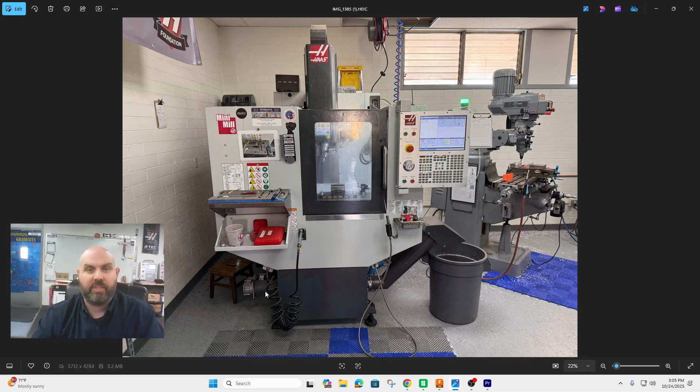Today we're talking about machine libraries. Specifically, how do we import our machine, which is a Haas mini mill, into Fusion? And then how do we add work holding, which happens to be our Fifth Axis, which allows you to switch work holding very quickly. So how do we also switch it within Fusion and have it all simulate accurately? Stick around. I'm going to show you how.

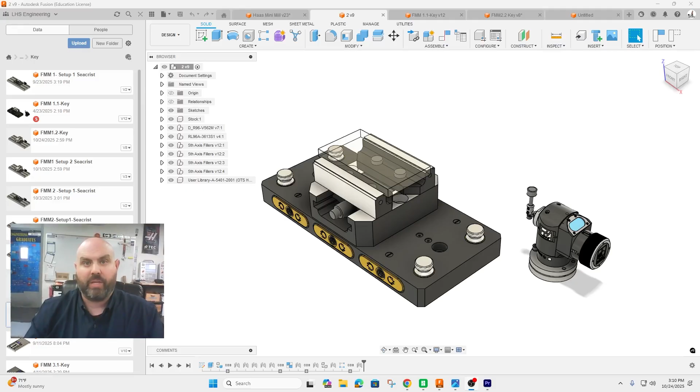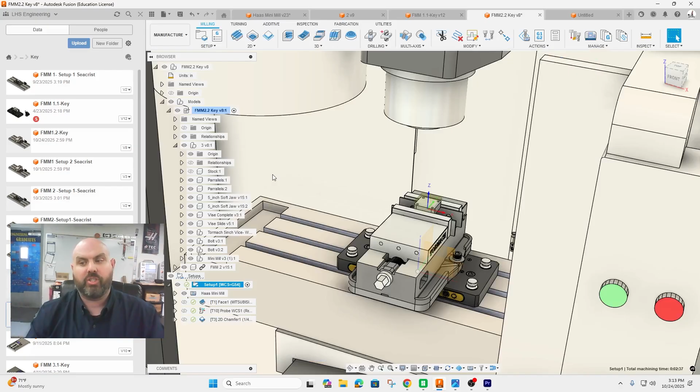Okay, to get to the simulation step, there's 5 steps we have to do beforehand. First, we have to design our work holding in the CAD file. We need to modify the CAD file of the machine. We're going to have to add the machine into the machine library. We are then going to have to build a CAD file with the work holding and the part to be machined. Then move to the manufacturing workspace, do a setup, create the operations, and then finally be able to simulate it within Fusion.

First off, I create all the CAD work holding for the students, and it's in a shared project. But for those of you who need to know how to do it, I'm going to go ahead and demo it now. So first off, I save them. There is an order to the numbering system, but we're going to go ahead and make a number 7. So I'm going to save the file as just number 7 within my work holding for milling machines. I also do this for lathes.

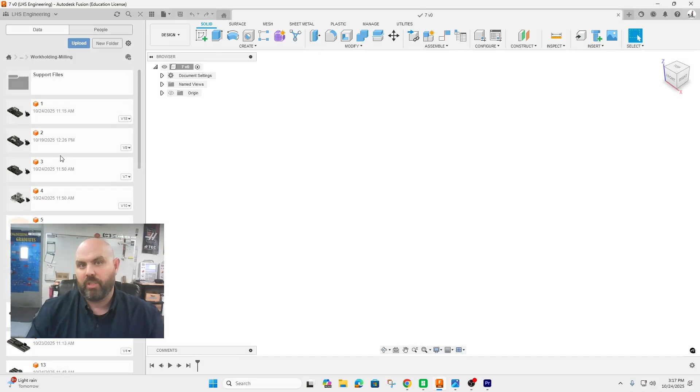And then I'm going to start adding components to the workspace. So my work holding supporting files is where I store all my vices, plates, and all the things that go on our machine. So we're going to start with a base plate. The most common base plate I buy is this double base plate from Fifth Axis. You can download it from their website. It comes in as a number, but I just change its name to double base plate. And then I insert it into the current design.

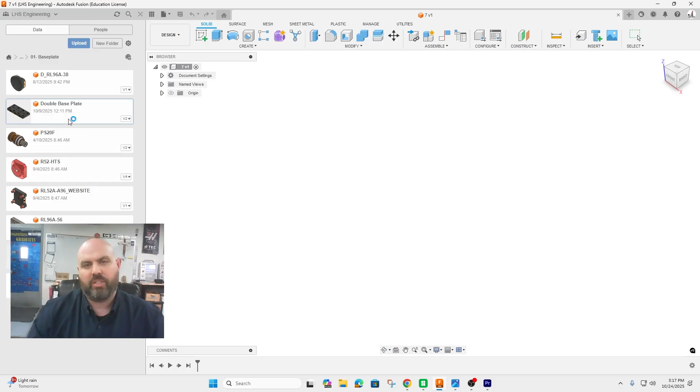Now, I don't really care where it goes in right now. I'm going to have to move it in a second. But the big thing I don't want is I don't want it linked to the original base plate. Breaking the link is going to be very important in this whole process. So I'm going to right click and say break link. And it moved in a way I don't want, but that's okay. The second thing is I want this just to move around as a unit. I don't actually care that all these components are movable.

Also, I'm not anywhere near the max mass of my machine. And if you were, you could actually put every bolt, nut, washer into this, and it will give you a mass of how much your whole project weighs if you are pushing the limits of, say, the mass your mini mill can hold. That's just a side note.

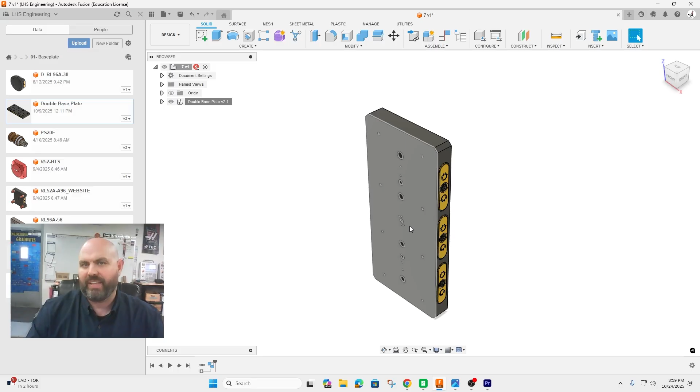So the first thing we're going to do now is unground from parent, and now it's free to move. It's also not a rigid group. So the second thing we're going to do is right click, rigid group, so all the subcomponents move as one. Now, the most important step is I need the bottom of this plate to be at the origin, because that's going to be very important when we set the origin on the CAD file for the machine. So when they come together, they line up.

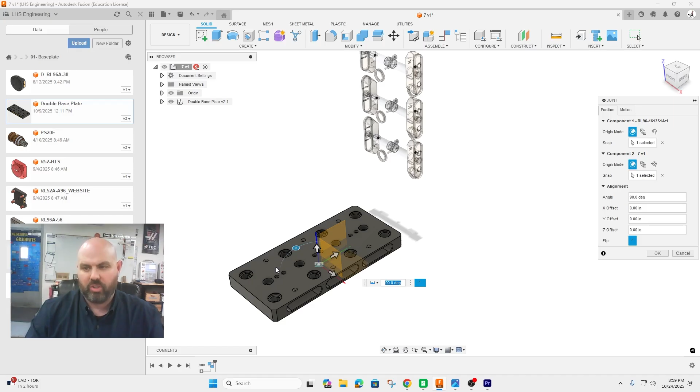So to do that, we're going to just use J on the keyboard for joint. I'm going to find the center of it, which is this point here. And then I'm going to turn on the origin, and I'm going to put it here. And I have to orient it in the proper orientation. So X, Y, Z matters. These go in my machine with the long axis along the X. So I'm going to rotate this 90.

When I click OK, those parts will move. And now we have it. If I really wanted to get critical, I should go in and rotate the other way, because this is actually the back side, because the open side is on the back and the torque specs are on the front side.

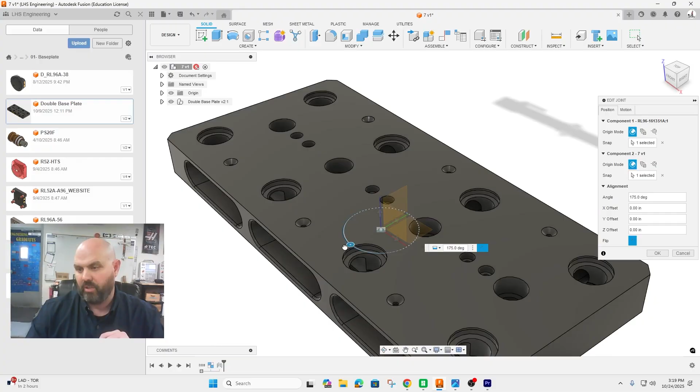So I'm going to edit the joint, and I'm just going to move it 180 degrees and get it going the right way. And you can see the torque specs are on the front, which is how my machine is. We're going to need to ground this or pin it in location so it won't move, so that when we do other things, we don't have problems. It's a very important step.

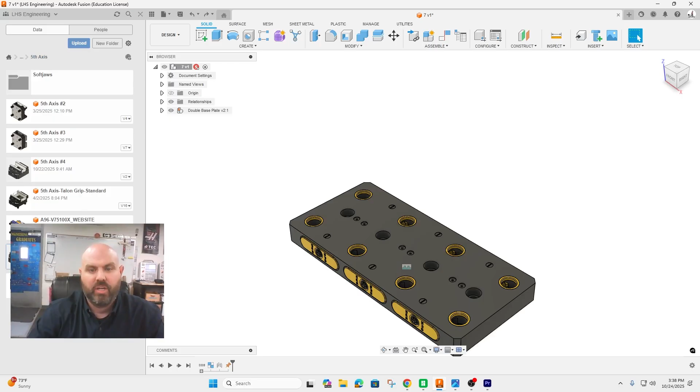So the next thing is I can turn off the origin. I don't need to see it anymore. Okay, our next step is we need to insert our vise. I've moved over to my fifth axis vises, and I'm going to right click. I know it's behind me, but I'm going to right click and say insert into current design. And our vise comes in. We're going to go ahead and click OK. And the very first thing we're going to do is break the link.

One thing this vise is going to have is we're going to actually model the stock that we would use with parameters so we could change the size into this work holding. So when we actually go to set this up and do the CAD files later, we'd actually take the part we want to machine, assemble it inside the stock as we hope to actually machine it, change the parameters so that the stock is the correct size, and then we'll move through the process. So to do that, we need the vise jaws to be dynamic within parameters. So the vise is not fully assembled right now. We're going to have to assemble it in this file.

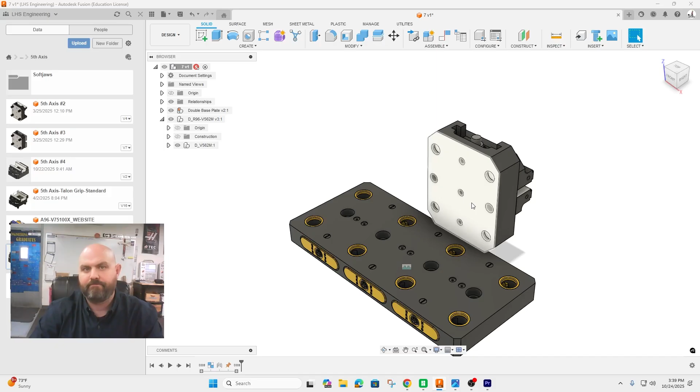So first, I want to get rid of the origin. I don't need to see it. Second, I'm going to take the base and attach it to the base plate. I don't have the pins. I could go to all that effort, but it just makes the file bigger, and they're not functional for the CAD, so we're just going to skip it. So on the keyboard, I'm hitting J for joint. We're going to assemble the bottom of the vise with the center of the plate right there. And we're going to go ahead and click OK.

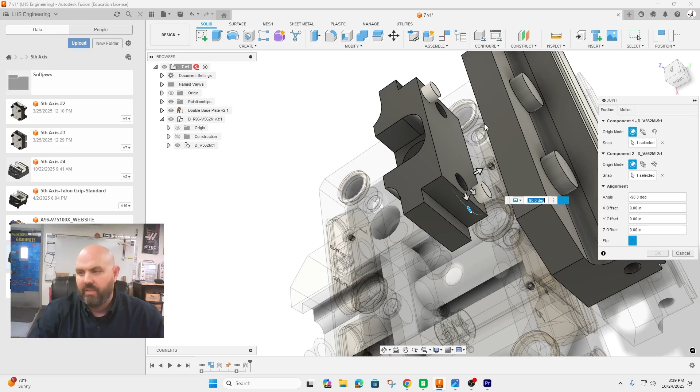Now, the jaws need to be linked together with the carriers. So I'm going to hit J. I'm going to grab any point on the jaw and any point on the carrier that matches and click OK. And then I'm going to hit J on the keyboard. Oops, before I do that, I'm going to move them out of the way, hit J, and I'm going to pick the carriers and the bottom of the jaw.

Now our next step, we need the dynamic parameters put in, because that's going to be needed to do the next set of assemblies. So we're going to go to modify, change parameters, and we are going to add 3 parameters. And I'm going to click OK here. The first one, I'm going to call stock_depth, which would be our y-axis. I'm going to set that to 3, and I could put down here y-axis. And then we're going to hit stock_width, and this would be also 3, and we're going to set this as our x-axis in the comments.

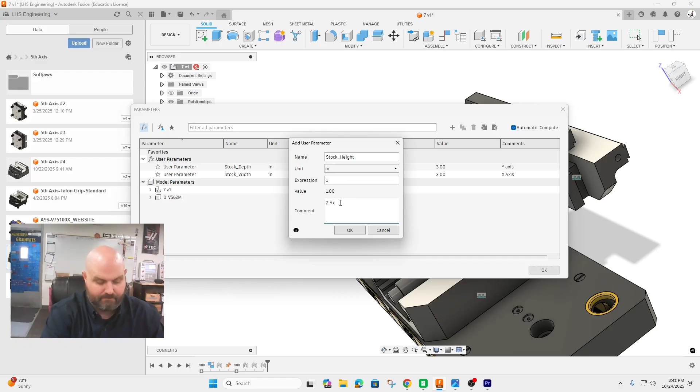Oops, I got those capitalized. I don't know if I did the other one capitalized. And then we're going to do stock_height. And we're going to set that to 1, and we would say z-axis, which will appear in the comments. And these all can be edited in the future to give us the proper stock height. And then I like to check these because depending on other factors, sometimes they get buried into things. This will always put them in the favorites. And go ahead and click OK.

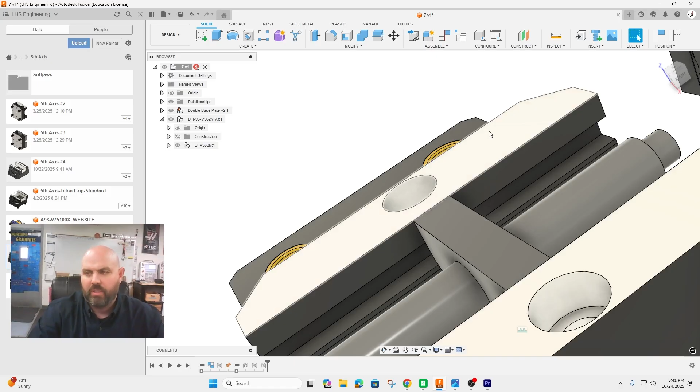Now, one piece of information we need, which we'll jot down on a piece of paper, is we are going to use the center of this bar here as our driving point, but it is not level with the ways of the vise. So I need to inspect that difference, and it comes out to 0.011. So we're going to need that number for later.

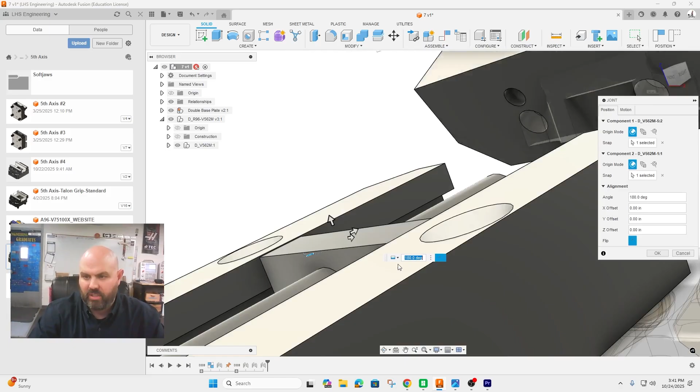So I'm going to go ahead and hit close, and I'm going to go J for joint. It doesn't really matter which jaw you start with, front or back, but I'm going to pick the bottom front edge of this jaw. And I am going to click here, which actually puts it wrong, as you can see right there. But if I move it up, I can move it up 0.011, and now it's on there.

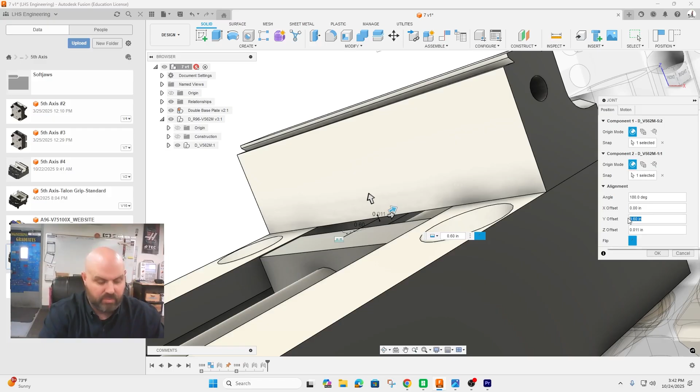Now I'm also going to slide it in this direction, and we're going to have to make a modification in a few minutes, but we're going to put this parameter as stock depth divided by 2, because remember these are self-centering jaws, so we only want 1/2, and we're going to go ahead and click OK.

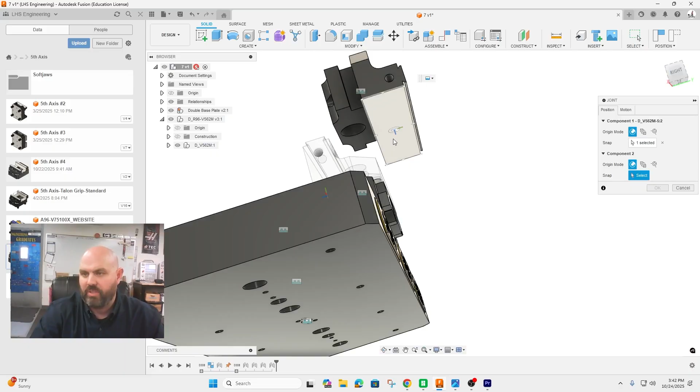And now, instead of doing that same procedure, which would be fine, the easier way to do it is just to go J, take the center of this vise and the center of this vise, and then set the distance apart to be stock depth. If I can spell it, there we go, and click OK. And now you can see that it is working. And if we go into parameters, we can do change, and we're going to change that stock depth to 2, and now the jaws change together with the vise.

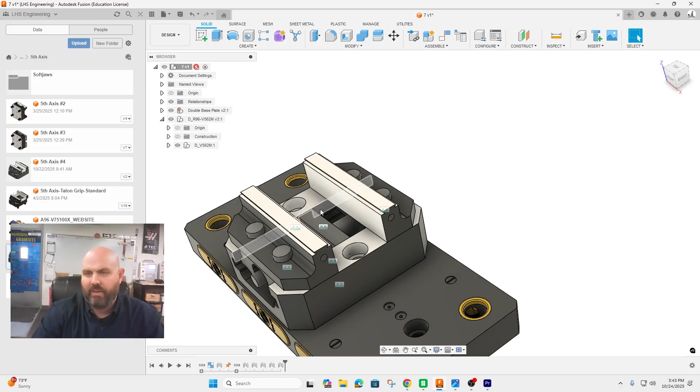Now, one problem we have is we are actually going to use these Talon grips on the top to attach our part for this example. So we need to now know what the change is so it actually grabs on this edge versus this edge. So I'm going to use inspect, and I'm going to inspect between these 2 surfaces, and the delta is 0.1. So the delta in total is 0.2 if we're going to do the same thing here.

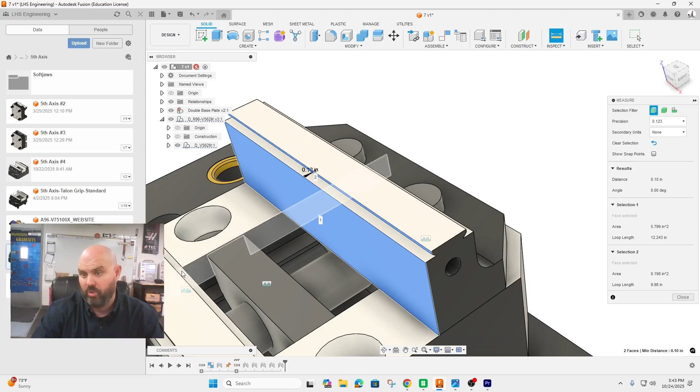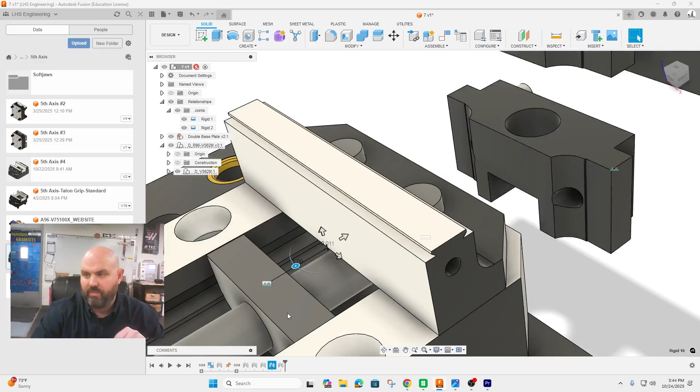So I'm going to open up these relationships, well, I can come down here to these relationships and go to the last two. So I'm going to edit the joint, and I'm just going to say, take the stock depth and subtract 0.2 from it, and that will close the distance. And if I go back to this joint, I'm also going to take this one. I'm going to have to put parentheses because I need to take the answer and then subtract it by 0.1. And now, oops, I did something wrong. Edit joint. Oh, it needs to be 0.1, not 1.

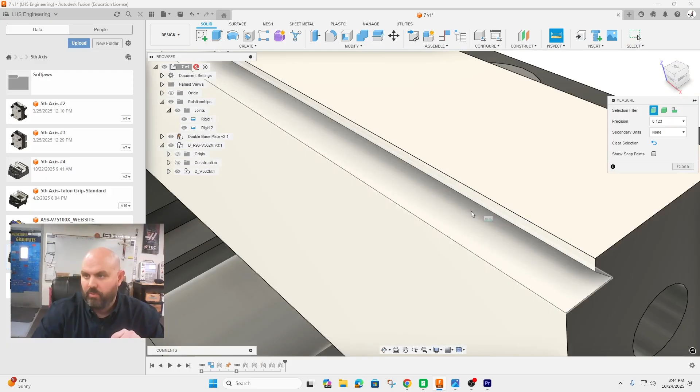And now, if we inspect between these jaws from here to here, it should be exactly the number we were looking for at 0.2. So we are most of the way there. We're going to do a few more things.

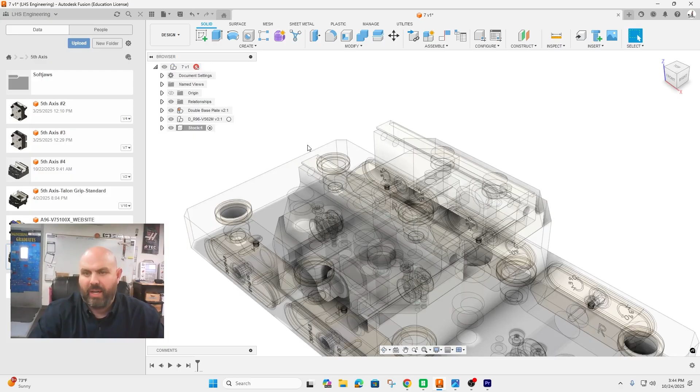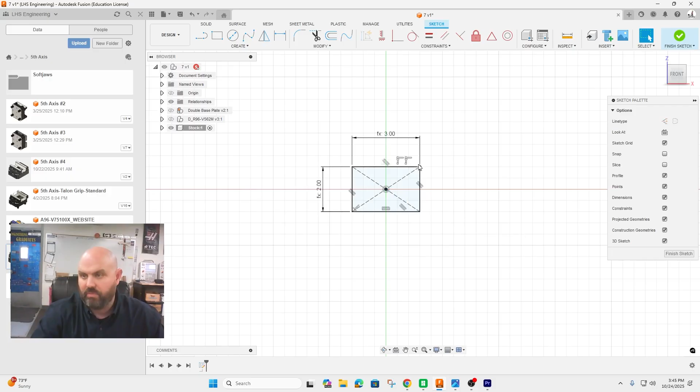One is we're going to draw the stock. So I'm going to go ahead and create a new component, and I'm going to call it stock. And I'm going to draw it. It doesn't really matter where because we are ultimately going to assemble it. So I'm actually going to turn these things off so I can start a sketch down here at the origin. I am going to use a center justified rectangle, and this would be stock depth, tab, stock width, enter, and we're going to go ahead and extrude that to stock height.

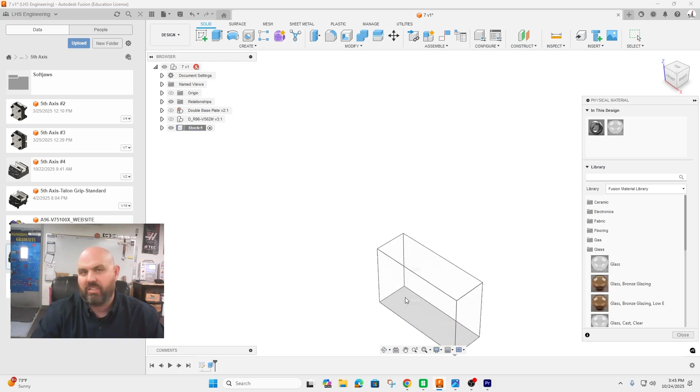And then to make our life easier, I'm actually going to make the stock out of glass. So I'm going to right click on stock, go to physical materials, and set it to glass. That way when we do the assembly later, it's clear and you can see your part on the inside with ease. This would be also a factor if you had a mass issue with your machine, so be aware of that.

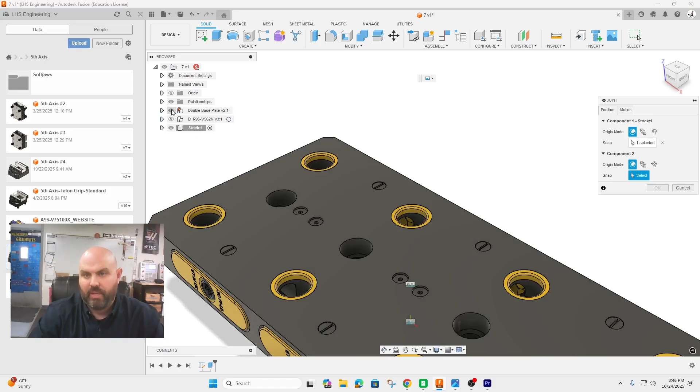So now we're going to actually join this onto the part. So I'm going to go ahead and hit J. And because this is a rectangle, it doesn't really matter. I'm going to click the center bottom, and then I'm going to turn on these other features. Oops, my mistake. I'm going to turn them off. I do not want the center bottom. I want the edge here, and then turn on the center features. And I am going to select the edge, not that edge, this front edge.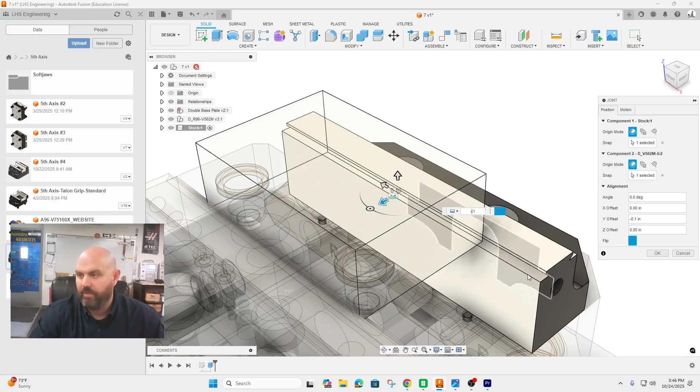And I can revolve it around 180 degrees. And then I need to offset it back to 0.1. I guess it's negative 0.1. There you go. And we click OK. And now if I go back to the main page, here is our assembly.

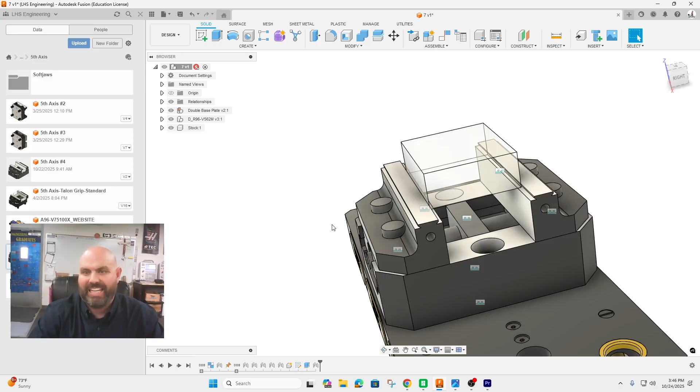And we are going to go ahead and check that it works by going to change parameters. We're going to change the stock depth, which is the only one that matters, to 2.5. Press enter. I can see it move in the background, and you'll notice that it all sticks together as normal. So now we have the real important part of the work holding together, but if we want to simulate accurately and show us any collisions, we need to add all the other features.

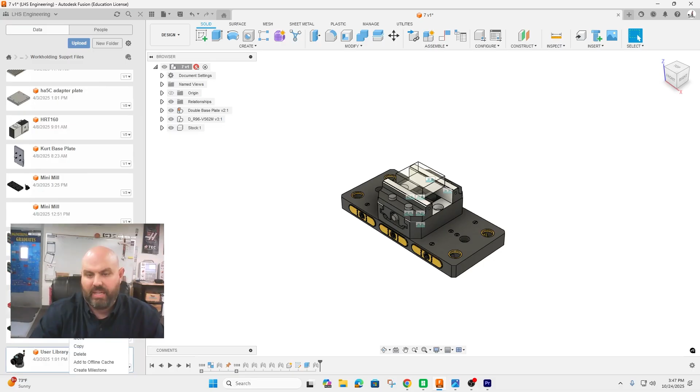The big feature on our machine is we have an OTS probe over here on the back right-hand corner. So I'm going to go into my files, work hold supporting files, and I believe at the bottom of this list, I have that probe. I'm going to go ahead and right-click and say insert into current design. And it kind of comes in the middle because it comes at the origin. I'm just going to slide it out of the way and click OK.

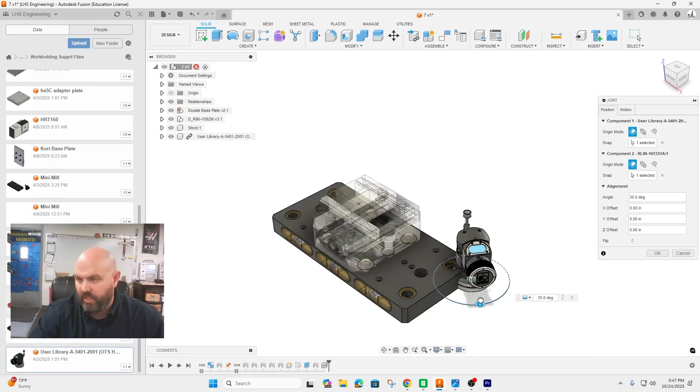And then I'm going to go J to join, and I am going to grab the bottom of the probe. And I am going to grab this corner right here, and I'm going to invert it, and I'm going to rotate it into the degree it goes. And then I know that mine happens to be 2 5/8 in this direction, which is actually X, but it's labeled Y. So 2.625, and it is offset in X 1.6 is where ours ends up.

Note, when we do this with the machine, it actually doesn't line up on the same T-slots, but my machine is different than the machine in Fusion, slightly with the T-slots, and I care more that this is accurate to my machine than to the T-slots. So if we had any other features to add, a rotary, any other work fixtures that may be in the machine, we could go ahead and continue to add them.

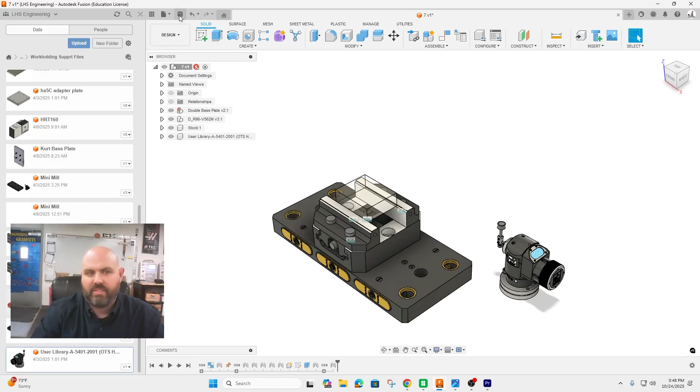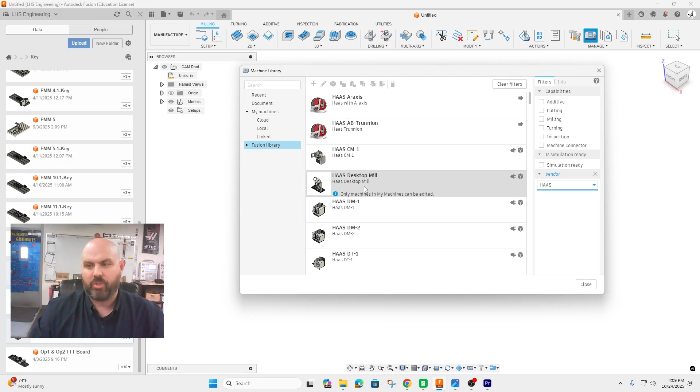The next step is we need to get a copy of the machine model into Fusion, and we're going to get that from Autodesk. We do have to download to then upload. Not the best method, but it's a method that works. So we're going to switch to the manufacturing workspace. We're going to go to the machine library, and we are going to click on Fusion libraries. I'm going to switch over here to Haas, and then I'm going to scroll down and find the mini mill. And there it is.

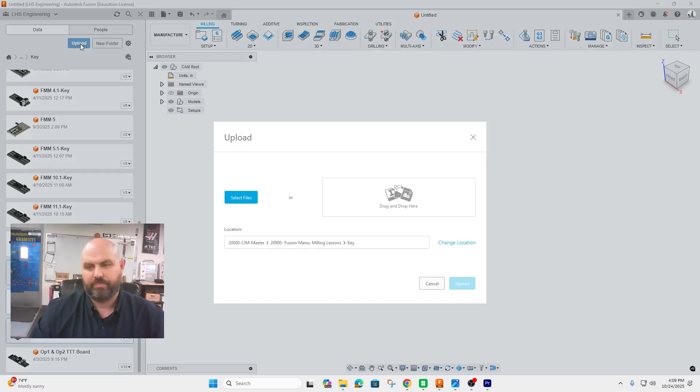And then I am going to actually export it. And it's going to download it, and I want to make sure it is downloaded as an F3D. And we're going to go ahead and hit export, and it's going to download. In the meantime, while it's downloading, I'm going to hit close, and then I'm going to go over here to upload. And I'm going to upload it into this folder where I store stuff. Here is the Haas mini mill. I'm going to click OK and upload, and it's going to take a moment for it to go through the uploading process.

Now, unfortunately, it appeared behind me on the screen, so I'm going to double click on it to open it. So it's going to open over here, and we're in the design phase. Now, the real critical component here is we need the origin of the machine to match the origin of the work holding, because when we bring them together, they're going to line up origin to origin. So we want to essentially match where the origin is in this model here with the origin of the work holding. The work holding origin was at the bottom of the base plate, so we want to basically put the origin of the machine at the center of the table.

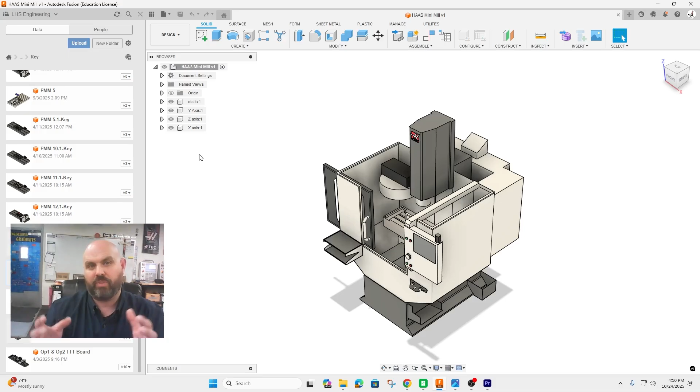Some machines it's not the center, and you can shift it left or right as needed. So what we're going to do here is we're going to go ahead and turn on origin. And this one came in, and it looks like it's come in exactly where we need it to be. Not all machines do. If it did not, I would use an as-built joint to move these to that location.

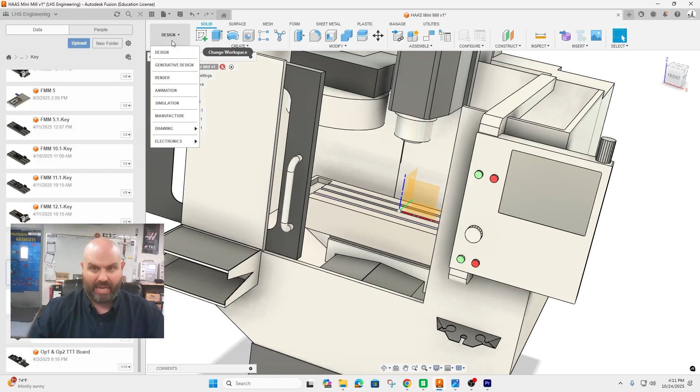So now that we have both the work holding done and the machine, our next step is we have to create a machine library machine. So we're going to switch back to manufacturing, and we're going to go ahead and click on machine library. Now, I'm going to do mine in my local. Normally, I would recommend doing it in the cloud. I already have a bunch of machines, so we're going to use local just to keep them separated.

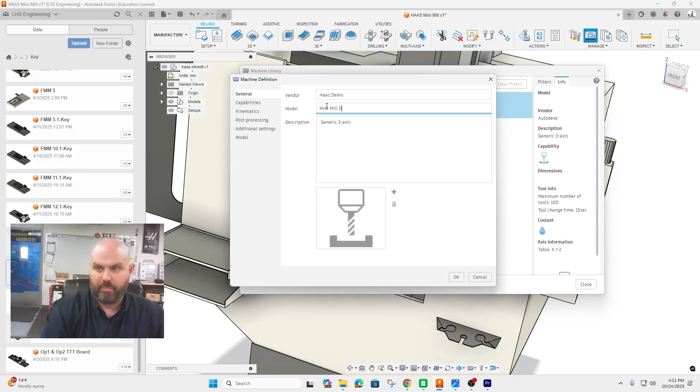We're going to hit plus and milling machine. And then we're going to go ahead and label it. I'm going to call this Haas and then demo, because this is an example, and the mini mill. So mini mill demo. That way I don't use it in the future because I already have the one that works. And I can write in a description here if I want.

Okay, for capabilities, we have 10 tools, and our maximum feed rate is 650 inches a minute. So we're going to go ahead and hit 650 and enter. Oops, we'll go to edit again. It'll bring us back up. We're going to go back to capabilities, 10, and make sure this has 650 inches a minute. Sometimes it converts it to millimeters, and that's like 25, and we'll have all sorts of problems.

The real one is kinematics, I think is how it's pronounced. We need to get this in the proper orientations. Now, the real way to think about this is think from the ground up. So as we get to each area, starting at the bottom, so we have the base, doesn't move. The saddle that controls the y-axis in a mini mill moves on top of the base. So the very top level needs to be the y-axis.

So it's hard to pull y up, it's easier to pull x down. So I'm going to move x below y. So the y slides front to back, and then the x slides on top of the y. So we have x, y, and then on top of that is the table. Now the z is on the head, so we're going to pull the z down under the table so it's on the head. And now we have the machine's kinematics, how it moves, oriented properly.

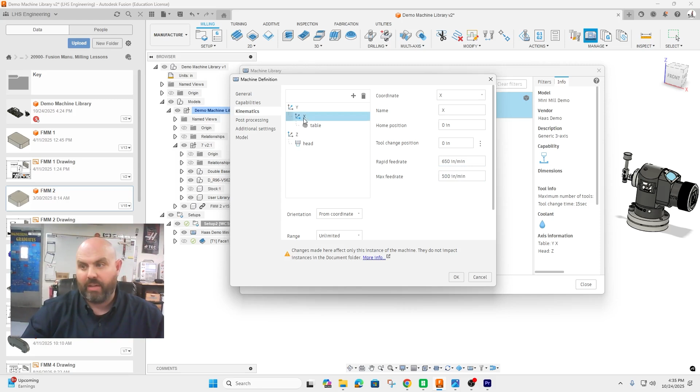Okay, for the rapids, we need to put in the rapid. For the mini mill, the rapid is 650 inches per minute, and the max feed rate is 500. Now, we would also do that for the X, which I've already done, and for the Z, which I've already done. It needs that in order to read the tools properly.

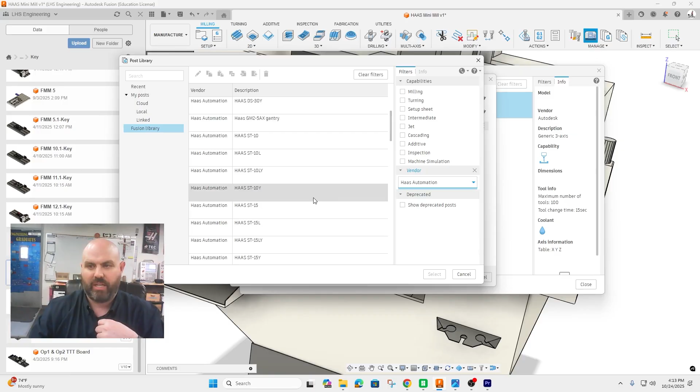So next step is post-processor. We're going to click on this, and the post-processor we're going to use from the Fusion library, once again, use Haas automation, is the next gen controller post processor. So I'm going to go ahead and click on this and then hit select, and it's going to ask us where we want to save it.

I am going to save it locally, not in the cloud. Cloud is recommended, that way you can use multiple computers. If you save this on only the machine you're on now, that's the only machine you'll ever be able to use it on. So go ahead and copy my post.

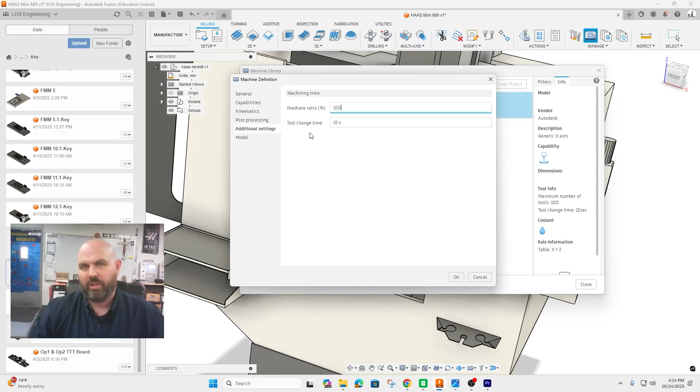Additional settings we're not going to play with. You can modify how fast the tool changer is. This will give you better numbers on machining time if you're looking at that.

Now for the model, we downloaded a model that we know has the proper origin, so we're going to use that one. So we're going to go ahead and hit select. Mine is in this folder, so I'm looking for Mini Mill. It's the one that I downloaded the latest, which is this one here. And I'm going to go ahead and hit select.

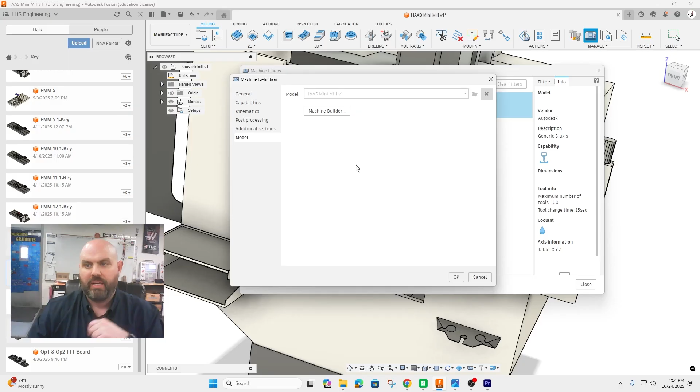Now I'm going to go into Machine Builder. Yes, I want to save it. And it's going to bring up the machine.

This is a model of the machine, but it's not editable in that way. We can see that our origins match, but more importantly, we need to verify a couple of steps: one, that all the axes move in the correct directions, and two, where our stock or file will load into and where the tool goes.

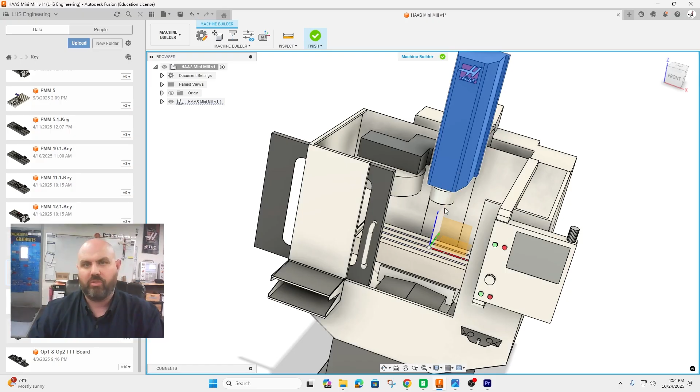First, let's check the axes. We're going to go here to Machine Preview, and there are these slides. It doesn't matter that it slides through the machine; what really matters is it moves the way the machine moves. X moves on top, yep, and Z should come up and down. So those all work. We can click on the home buttons, but you can also just hit OK.

Now the other thing we need to double check is we'll click on Machine Setup. These top two matter the most. Where is the part? Right now the part is right here at the center—that's what we want, so that's good. When we click on Tool, that's up at the top, also where we want. It does not always come in this way for your machine.

So in theory now, if all is programmed correctly, when we bring the work holding in, it will align point to point here, setting it up on the table like it's in our machine, and the machine kinematics will move in the motions that we plan.

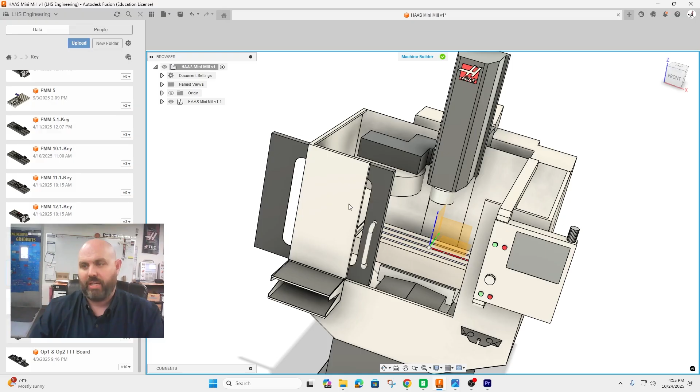We're going to go ahead and hit Finish, then go back over here. It's thinking through the machine library, and you notice we have this Haas demo, Mini Mill demo in our local library. We'll go ahead and hit Close. We are going to get out of this as well—we don't need this anymore.

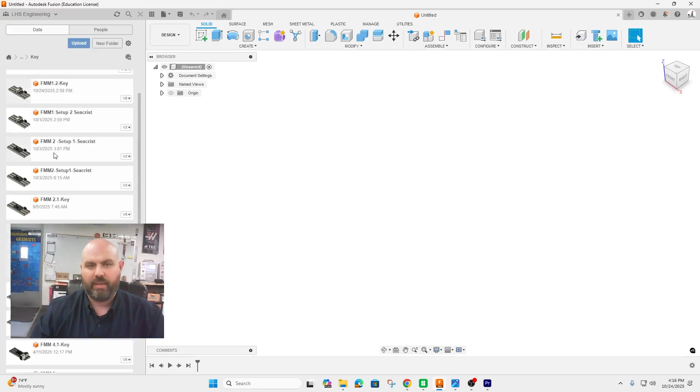We're going to do a quick demo of how all of this would come together. The very first thing is I am going to need to use a part. So we're just going to use this simple part right here, and we're going to put it together with our work holding and then the setup and do a simulation.

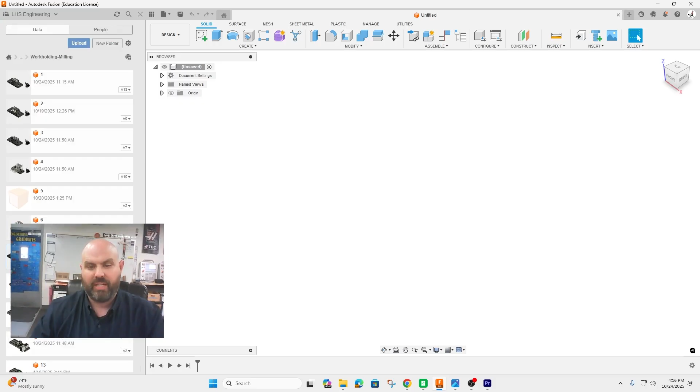We're going to go to Home. We're going to start with the work holding because we need it to be on the bottom. So I'm going to go ahead and open work holding, the milling, and then we are worked with tool number 7, and I'm going to insert that into the current design. Now I know because I designed all these parts, I'm going to go ahead and click OK.

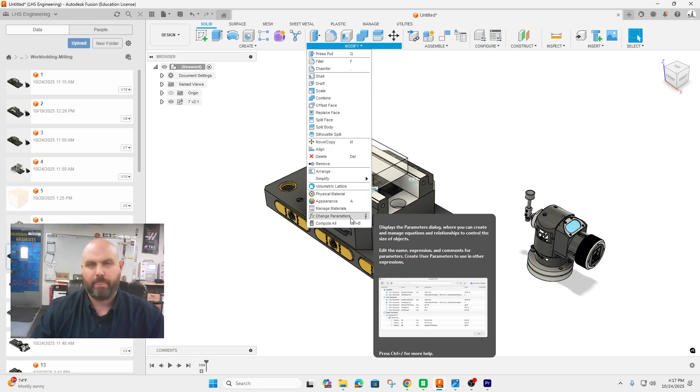First thing I'm going to do is break the link, because I don't want the changes to the stock here to affect my original. I'm going to change the stock size first. I know this material is aluminum and it's 2 inches by 2 inches by 1 inch thick stock that we're going to use to manufacture it. So we're going to go into the parameters and change it. We can close this: the depth is 2, the width is 2, and the height is 1. And there is our stock.

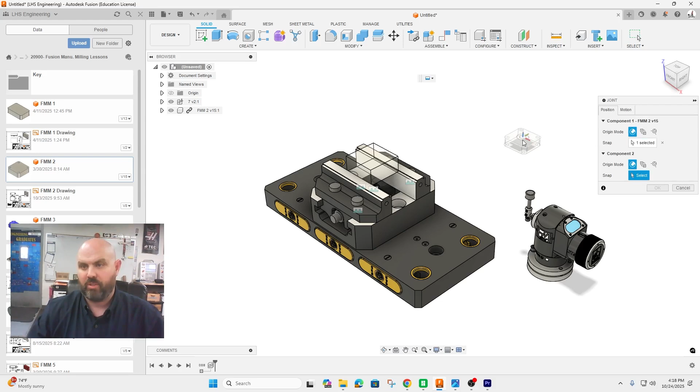The next thing we need to do is put the part we want to machine into the work holding. I've already navigated to that. I'm going to right click and say insert into current design. It's going to come in. We're going to once again slide it temporarily out of the way, and then just like a part, we're going to assemble it with a joint—J for joint, center of the part, center of the top. Obviously, that's not how it's going to get machined.

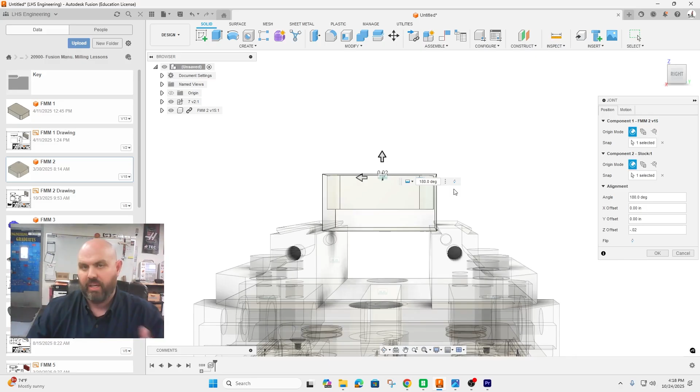We're going to flip it over. My standard policy is we're going to push it inside the stock by 20 thousandths. So I'm going to go to the Z and say negative 20 thousandths, which will allow us to have some material to do a face cut and remove. We can see that this is the raw stock and there is our part. We go ahead and click OK.

The next step is we need to save it. So I'm going to go ahead and save it, and I'm going to call this demo machine library.

Go ahead and hit save. It's important — you cannot work with the machine if you haven't saved it.

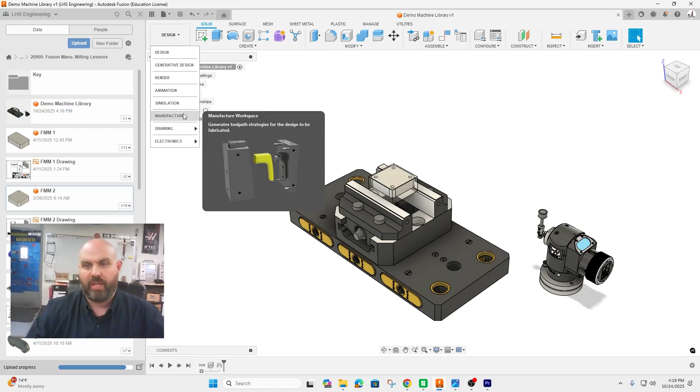Next step, over to manufacturing. We're going to go ahead and hit setup, and then we are going to select our machine. It'll automatically go into our machine library. I'm going to select this machine — you can see it has the name of the machine there. We are doing milling; we're going to change this here in a second.

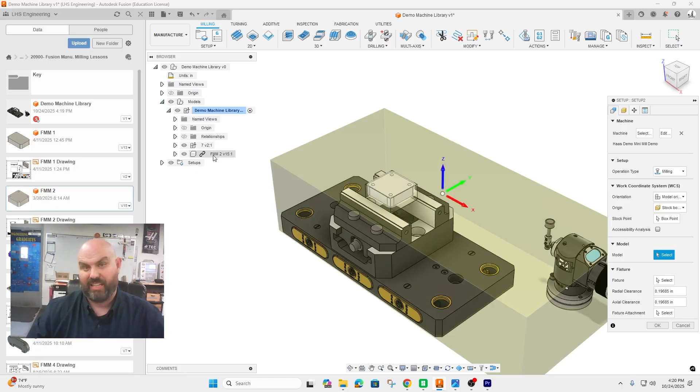We're going to go to model, and the easiest way to get to this is to actually open all these files and select the model. It'll put it there. If we want to change the stock location we could, but we're going to right click and go orthographic. We want it on the very top of the stock, which is exactly where we want it, because we're going to do a probing operation to make this work.

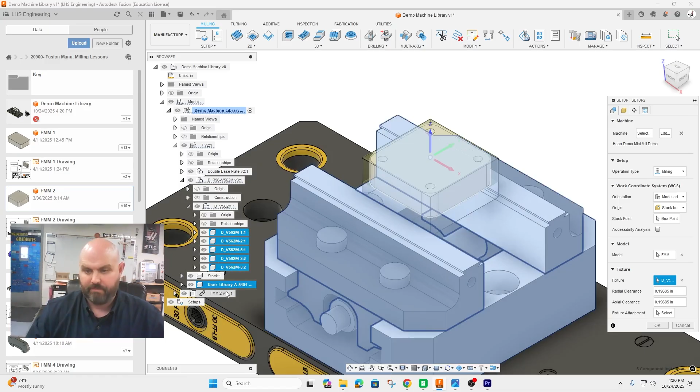For fixture, we can open up this folder and we are going to select all of these things. I'm going to hold down control, except for the stock. Oops, I should close this and select that — we do not want the stock. And we want also this and this. That way, if the machine hits any of these things, it will warn us that we have a collision. Obviously we want it to hit the stock, so we're not going to select stock.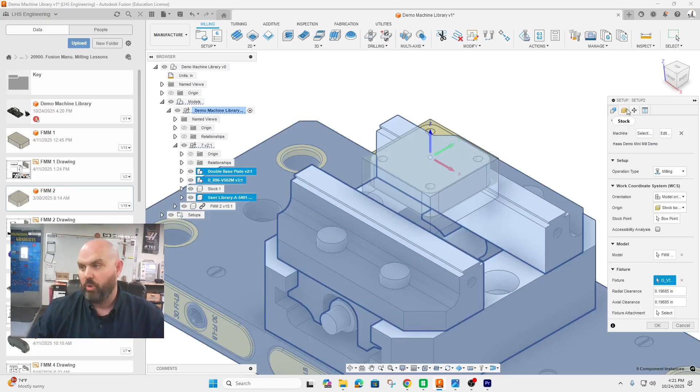We're going to go ahead and move to the second one. We're going to pick from solid, and we are going to pick the stock. We no longer want to see the stock after this point, so we're going to go ahead and hide it at this point. And then we're going to go to positions.

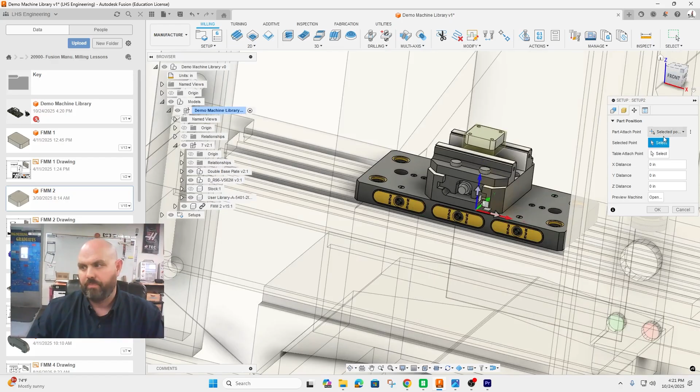You do have to normally go from fixture box to point. And if we look at it, you'll notice it came right into the machine where we wanted it to. Then we would go through here and set in our program numbers — I'm not going to do that at this time. And we go ahead and click OK.

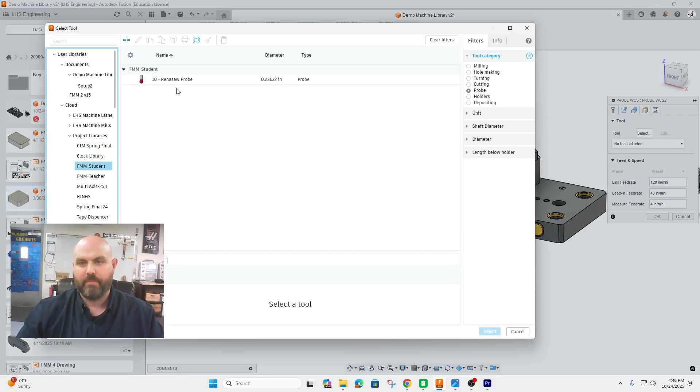Okay, we're going to run two machine operations, probing and facing, so we have something to show in the simulation. First we're going to go to inspection and hit probe, and then select from the tool library the Renishaw probe. Then I'm going to select the sides of this. There's a very small difference between the part and the stock, so I can go ahead and use the model. It gives us a probing operation, and I'm going to go ahead and click OK.

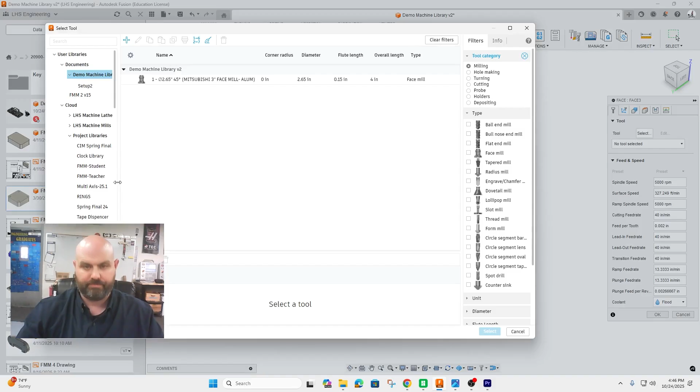Next, we're going to do facing, so I'm going to switch back to milling and hit face. I'm going to select from the tool library a facing mill. I have a whole video on how to machine this part on my channel, so go ahead and watch that video if you want to know how to do the whole part — I'm only showing part of it very quickly. So we selected the facing tool; there really isn't much more to do, so I'm going to go ahead and click OK.

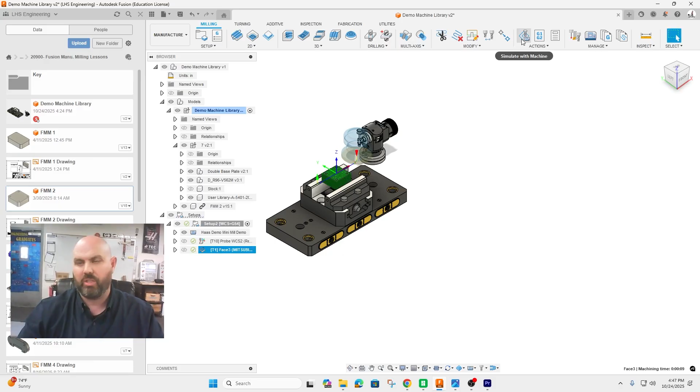Now that we have two operations done, we're going to go ahead and try simulation. Okay, it says there are 4 errors — let's see where those are. Let's go ahead and hit play, and it's showing it probing and facing. I think it's flagging those errors because of the difference between the stock and the part, but overall it gives a good simulation of how it would work. It even shows us where the errors are.

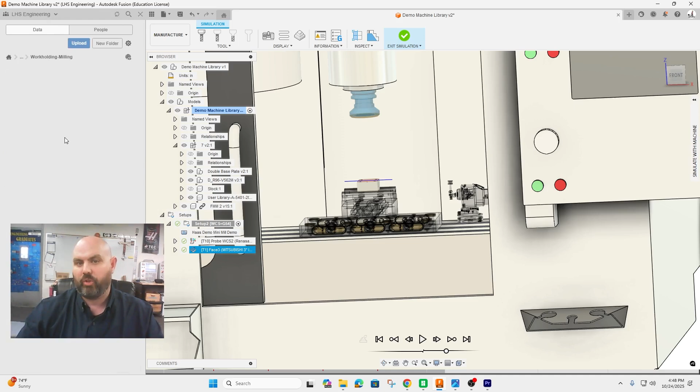To fix that, we would go back into the probing, modify it from model to stock, and then select the stock faces. But that's an overview of how to create a machine in the machine library. Now, this whole process could be repeated with a different work holding. So all of my work holding that I've created — if I wanted to use a different vise, like this vise — I would just do all the same operations, use the same tool, it would appear in the same spot, and all of this could be repeated with ease.